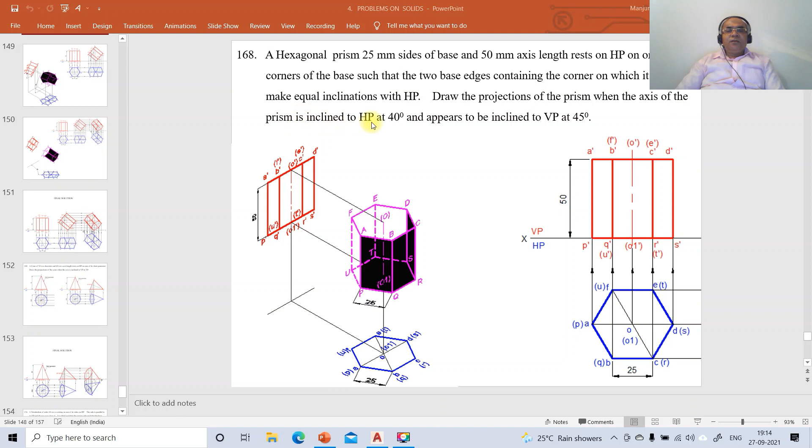Draw the projections of the prism when the axis of the prism is inclined to HP at 40 degrees and appears to be inclined to VP at 45 degrees. To do that, first we'll go to the AutoCAD screen, switch off the grid mode and switch on the ortho mode. The command is limits. So here 0,0, upper right corner is 297,210.

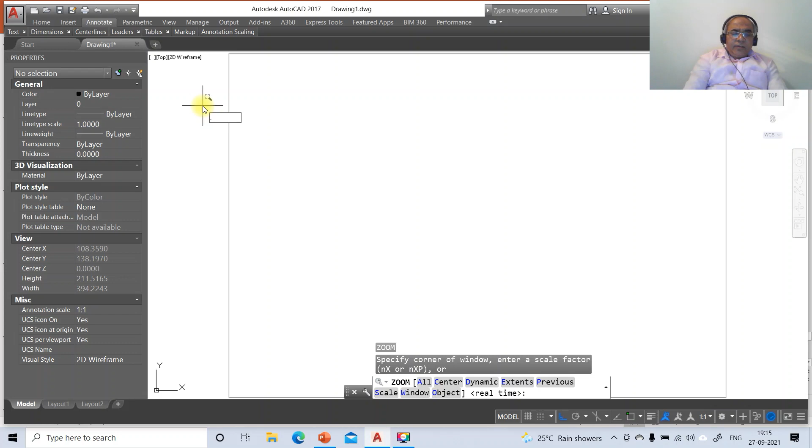Then go to line, select some arbitrary point, take the distance as 297. Then take the cursor to the top side, take the distance as 210. Then take the cursor to the left side and type the distance as 297 and say close, and then zoom extents and zoom 0.6x. Now we will go for the layer command.

Click on new layer, type the layer name XY. Click on new, type the layer name axis. Click on new, type the layer name front view. Click on new, type the layer name top view. Click on new, type the layer name front view hidden. Then click on new, type the layer name top view hidden.

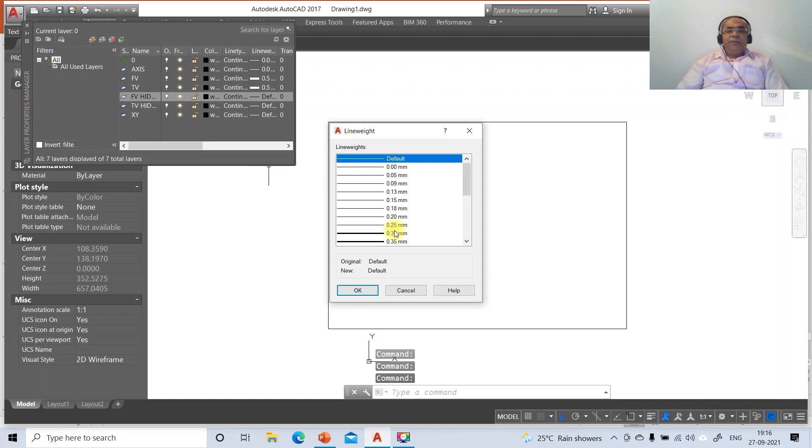Now once you do that, we are going to assign the line weights, make it 0.05. Then axis, again it will be 0.05. Then front view will be 0.5. And the top view, again it will be 0.5. And the front view hidden will be 0.3, and top view hidden will be 0.3. And the XY line will be 0.3.

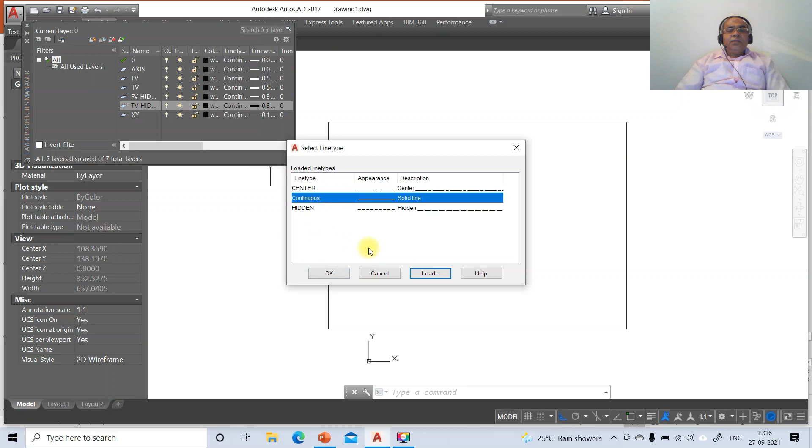Then you click on the continuous of top view hidden, click on load, type H. So you select this hidden, then go to load, to take center, type C and say OK. So you click on hidden line type and say OK. And click on front view hidden, you will click on hidden. Then for the axis line type continuous, you make that as center, then say OK.

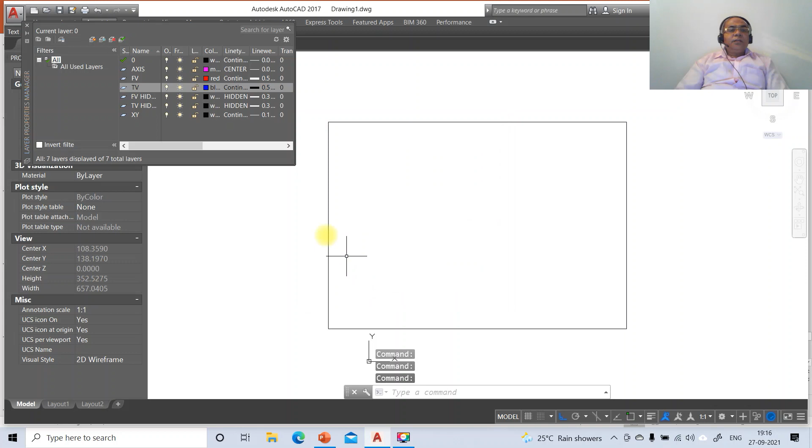And then the axis line, you make it magenta and say OK. Then front view, you take this as red. And top view, you take this as blue. Then front view hidden as red, then top view hidden as blue. And say OK, and then say close. Now we will go for the hexagon.

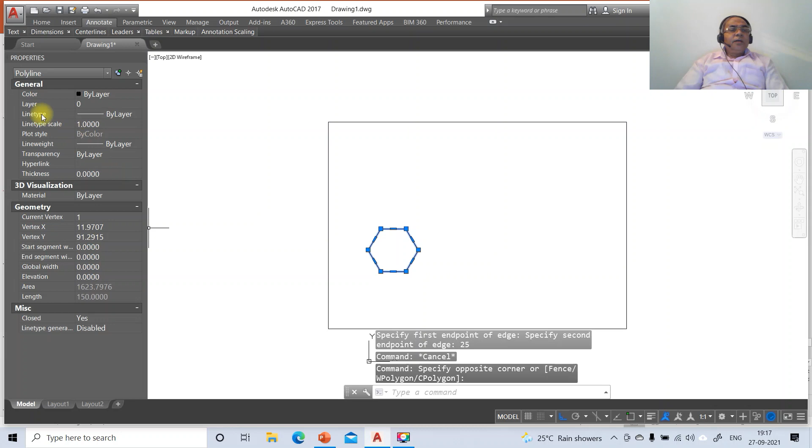So first we are going to take the polygon command, take the number of sides as 6, take the edge option and take the distance as 25. Then you just click on this and go to layer, make that layer top view and escape. Go to line, take INT of this and take intersection point of this. Then go to line, take INT of this and take intersection of this.

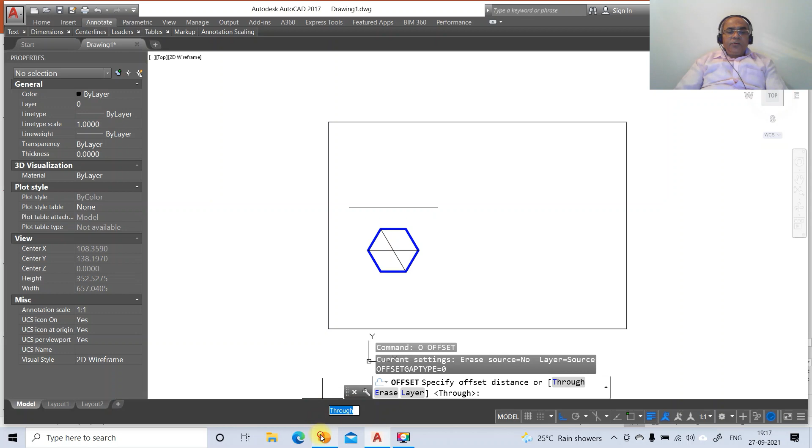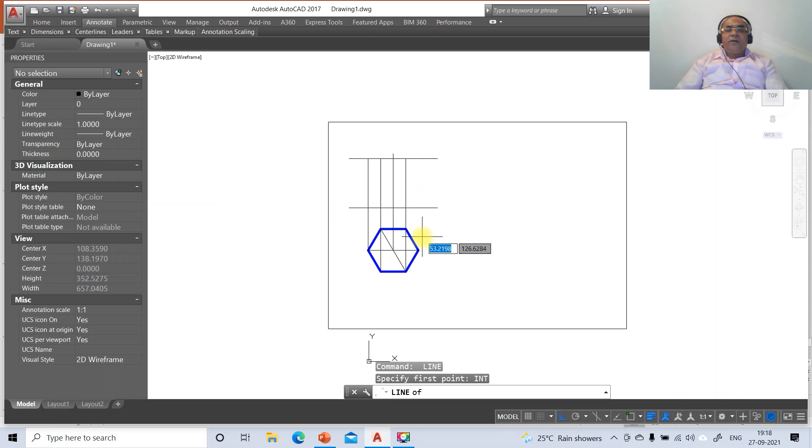Then go to offset. Now take the offset distance as 50. You select this and offset here. Then go to line, take INT of this and draw a vertical line. And go to line, take INT of this and draw perpendicular to this. Repeat: go to line, take INT of each point and draw perpendicular to this line.

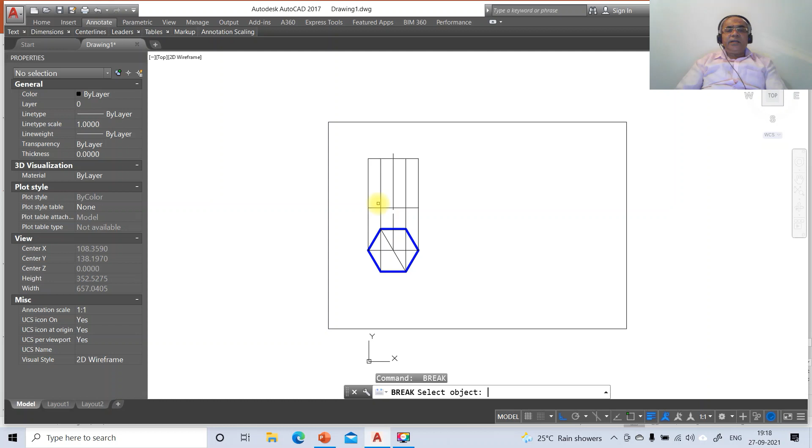Then go to trim, select these two as the cutting edges, then objects to trim as these two. Then go to break this line till here. Then go to break first point, take INT of this and say at the rate. Repeat break first point, take INT of this and say at the rate for the remaining lines.

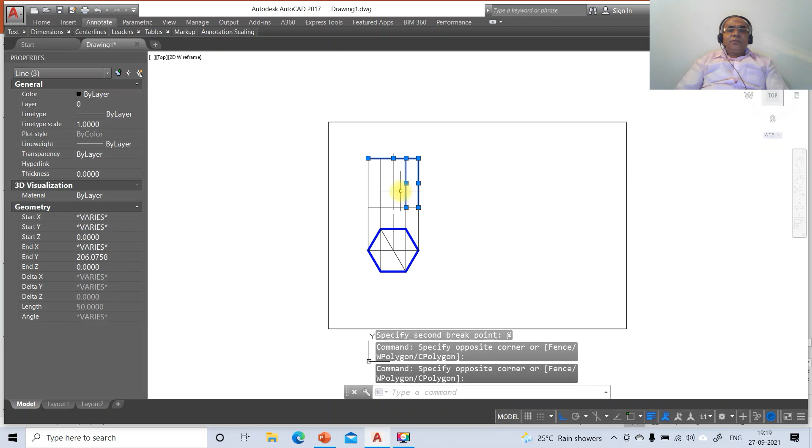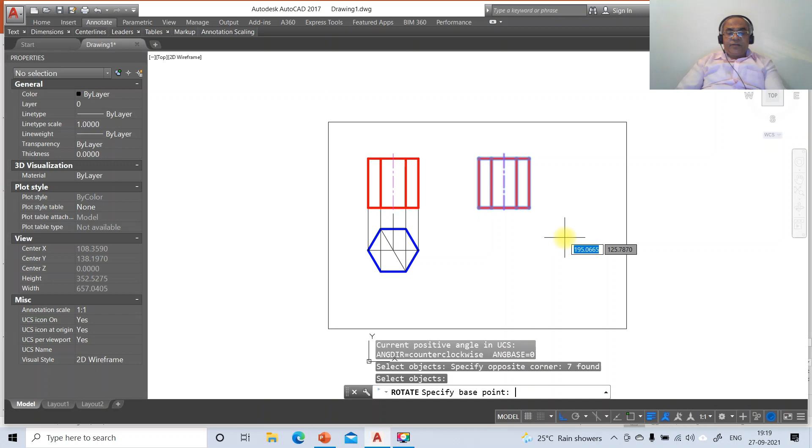Now you just click on these two lines, and go to layer, make this front view. Then again click on this and go to layer, make that layer axis and take the line type scale as 10. Then go to copy, select this entire drawing and copy to the next position. And now rotate by an angle of 40 degrees with respect to the XY line. So with respect to the vertical, it will be 50 degrees in counterclockwise direction, so obviously it will be positive.

Then go to move previous, you select this. Then go to line and draw a horizontal line. Go to line, take INT of this and draw perpendicular to this. Then go to line, take INT of this and draw perpendicular to this.

Similarly, go to line, go to the intersection of this and draw perpendicular to this. Then go to line, take INT of this and draw perpendicular to this. Then go to line, take INT of this and draw perpendicular to this.

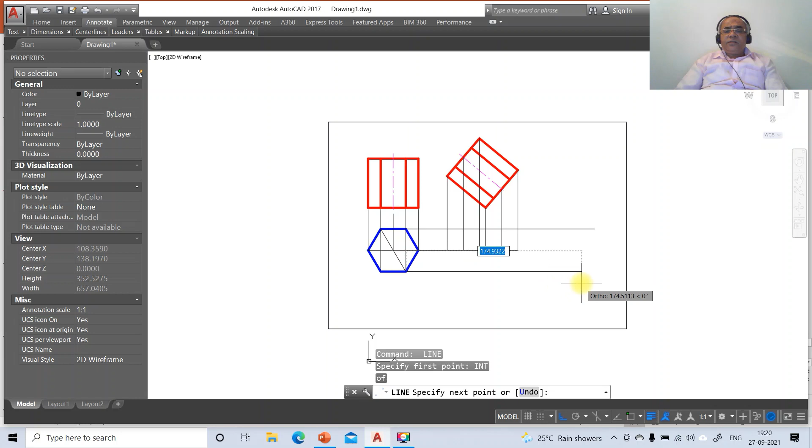Now once you do this, fillet between these two. Then go to line, take INT of this, then go to line, take INT of this, then go to line, take INT of this and draw perpendicular to this, then go to line, take INT of this and draw perpendicular to this. So the top surface is over.

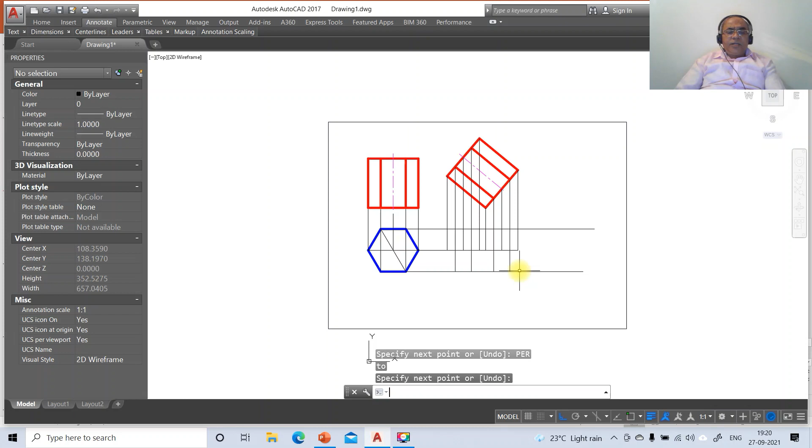Similarly, the bottom surface: draw perpendicular to this, then go to line, take INT of this and draw perpendicular to this. Now similarly, go to trim, select these two as the cutting edges and these two as the objects to trim. Now we will go for line. Take intersection of this, this, and this. So this is the top surface.

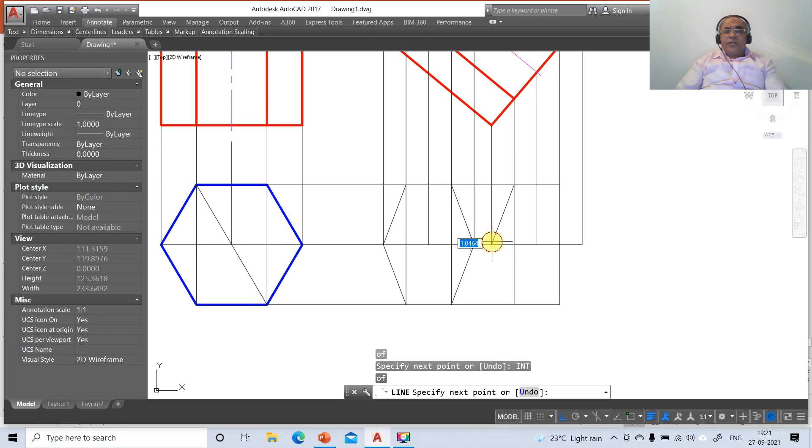So this hexagonal top surface I am joining now between these four. Then go to line, take INT of this and take intersection. Now I am going for the bottom surface hexagon. Take this intersection, this intersection and this intersection. Once you do that, go to break.

First point, take INT of this and say at the rate. Then break, first point, take intersection of this and say at the rate. Repeat the break at each intersection. Then it's already over.

Then go to break, first point, take INT of this and say at the rate, and repeat the break at each remaining intersection.

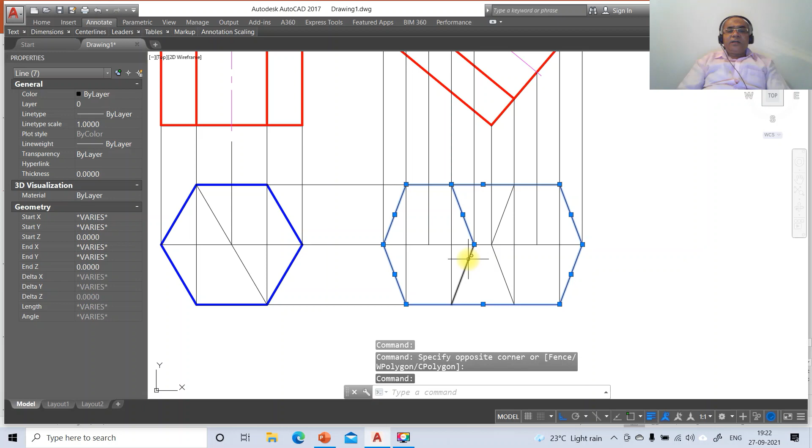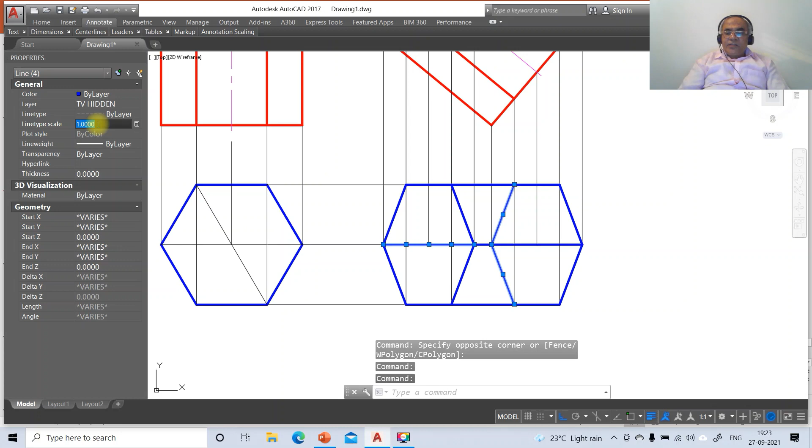Once you do that, zoom previous, then go to line, take the intersection of this and draw a horizontal line on this side and also from here on this side. Now we need to copy and rotate. Take the copy command, take the second position top view and copy it here.

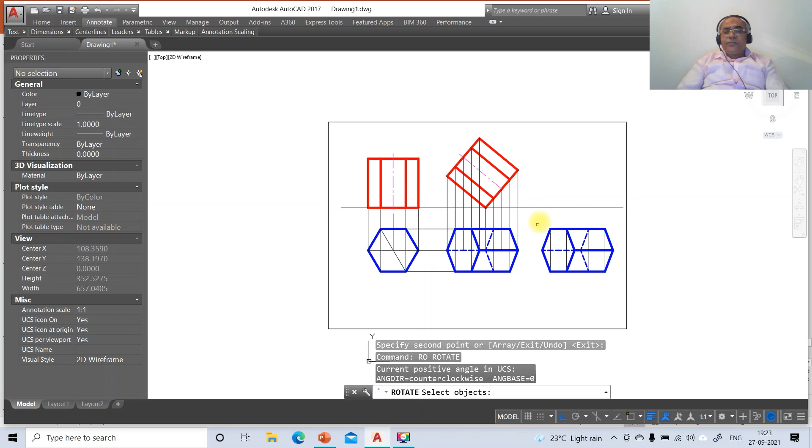Then go to rotate, rotate this about the intersection point, and the angle I want is 45 degrees clockwise, so I will say minus 45. Then go to move, switch off ortho mode, move this and place it wherever you want. Then zoom window; now I need to draw the third position front view.

To do that, click on ortho mode, then go to line, take INT of this and draw a horizontal line, take INT of this and draw perpendicular to this line. Then fillet between these two. Then come down to the next one, go to line, take INT of this and draw perpendicular to this, then line, take INT of this and draw perpendicular to this, then go to fillet.

Fillet between these two. Similarly, go to line, take the intersection point of this. Here you don't have an intersection but an endpoint, so take this endpoint, take perpendicular, then fillet between these two. Similarly, go to line, take INT of this and draw perpendicular to this, twice, then fillet between this line and this line.

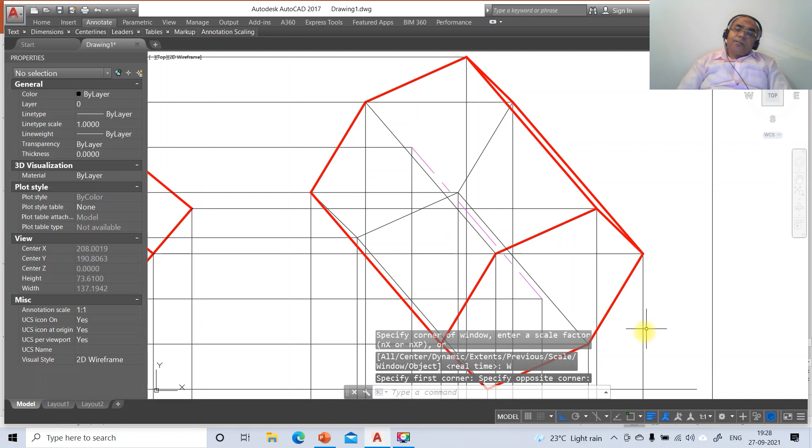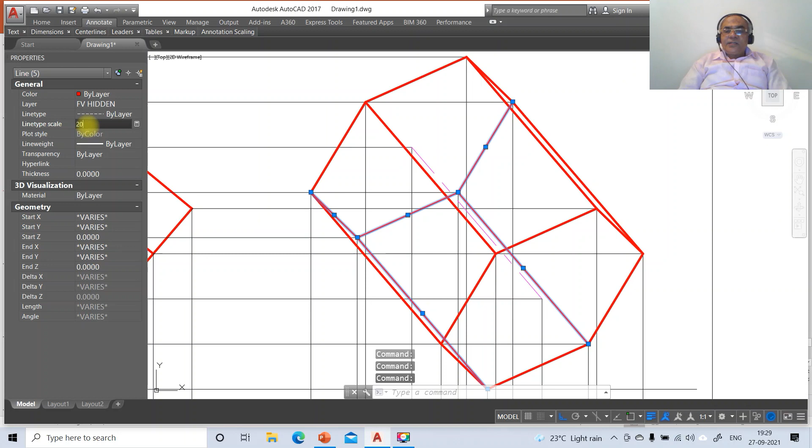Now you just come down to zoom window, as we know this line is visible, and here, okay, so this line is visible, so go to layer, you make that layer as front view. Now we have the left out portion is this one, so this line and this line and this line and this line all becomes invisible. Go to layer, make that as front view hidden, and take the distance as 20. So this drawing and this drawing is one and the same.

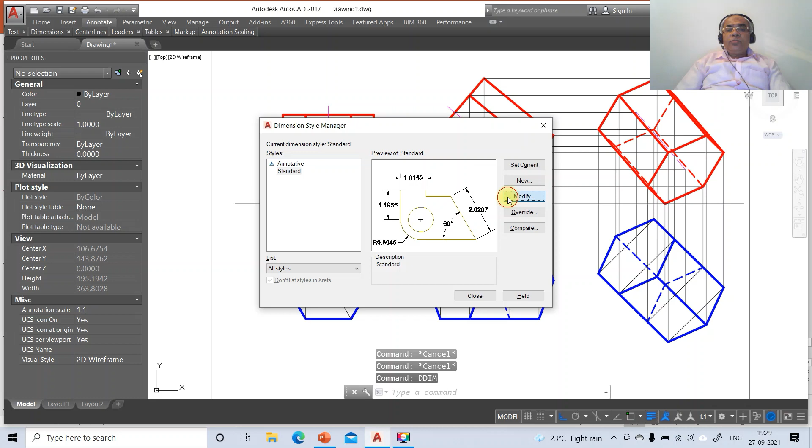So once you do that, then you just come down to this, then go to zoom previous. So you click on this and you click on this, go to layer, make that layer as XY. Then you just come down to zoom window. Now we need to go for DDIM, then go to modify, go to primary units, make it 0, go to text, take the text height as 3, align with the dimension line. Above, take the offset from the dimension line, go to arrow size as 3, go to lines, offset from the origin as 3, and say OK and say close.

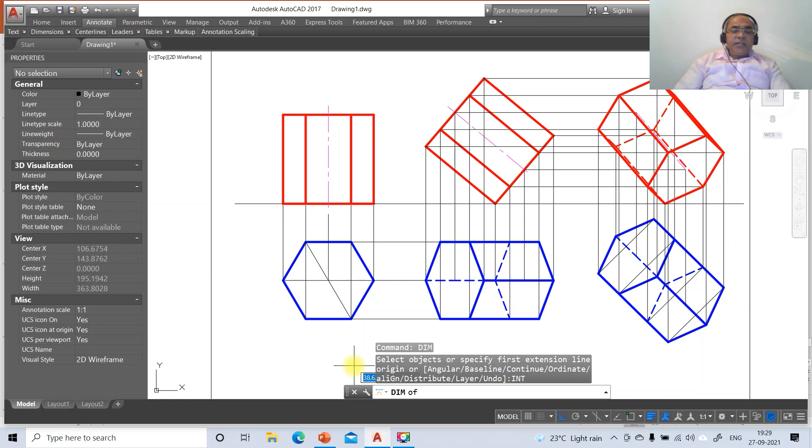Now we have dim, you take int of this and take intersection part of this. So you just go to 25, then go to intersection part of this and take int of this, and you're going to get 50. Then go to angular, select between this line and this line. So we got 40. Then angular between these two. So you're going to get 45.

So you just go to DIMTEDIT, text edit dimension. So you take this angle as 45. Then you take this as 40 degrees. Now we have break this line till here. So then we go to the text. So you mark this as 3, capital X, capital VP, and you have capital HP.

So you have capital Y. So here you mark this as small a, b, c, d, e, and f. Here it is O, and here it is O1 in bracket. Then you mark it as small p in bracket. All these are the bottom surfaces when you look from the top view, so they will become invisible. Obviously they will be shown in brackets, which is s, t and u.

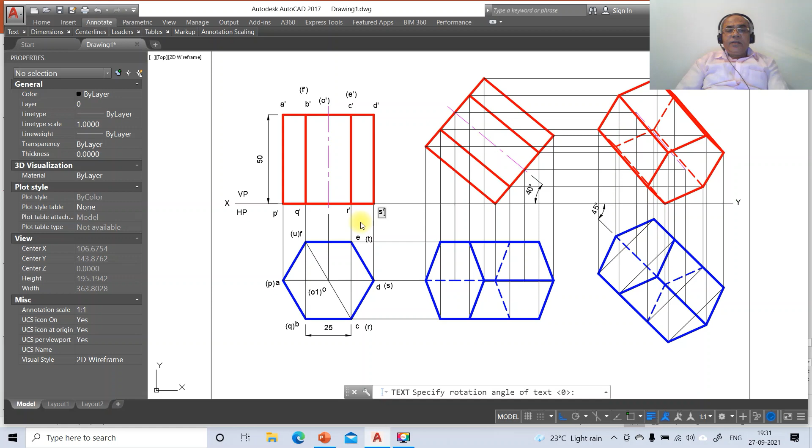Now we go to the front view. The edges which are near to the observer are visible. So A dash, B dash, C dash, and D dash become visible. Similarly you have E dash in bracket and F dash in bracket. Then O dash in bracket. Then P dash, Q dash, R dash, and S dash become visible. Then T dash in bracket, U dash in bracket, and O1 dash in bracket.

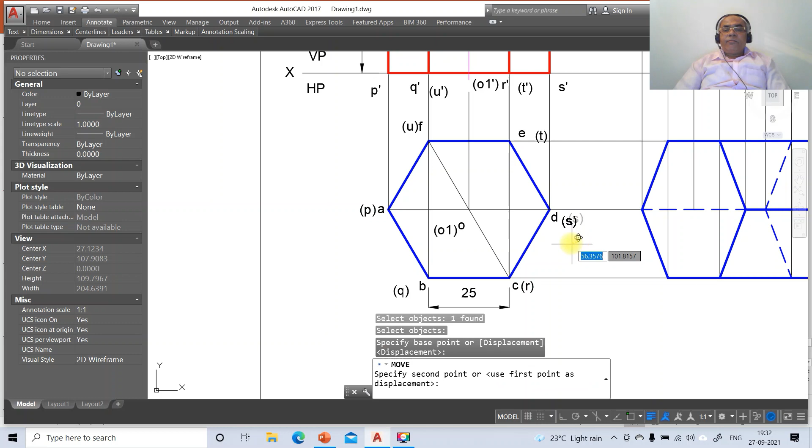Once you do that, go to zoom previous, then zoom window, take this, then go to move. So you take A, then P, then B, go to move this, you take C, R, D, S, O, O1, and Q.

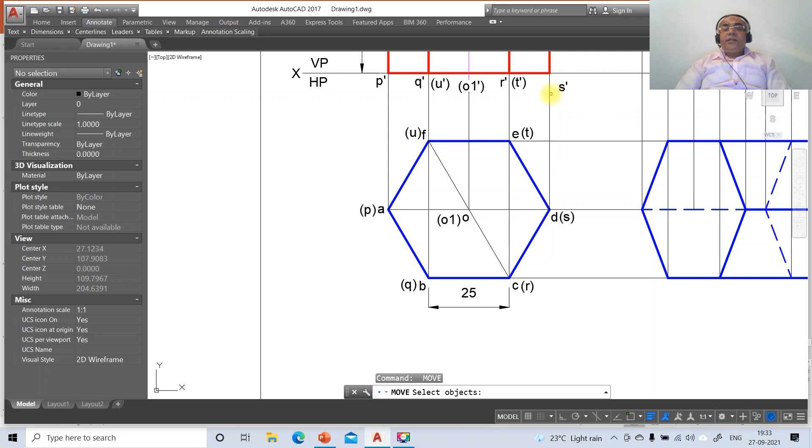Then you take E, T, F, U, then HP, then VP, then X, then P dash, Q dash, U dash, O1 dash, R dash, T dash, S dash. So here you take, here you take.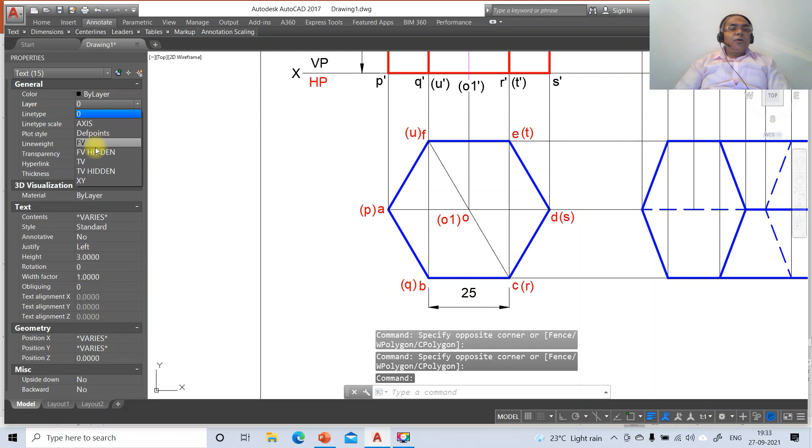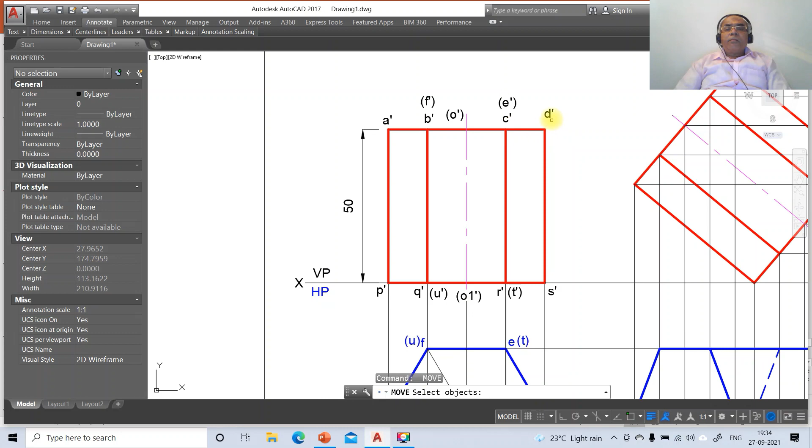Go to layer, make that layer as top view. Once you do that, go to zoom previous, then zoom window, then move. Then you select all these points, then VP. Layer, make that layer as front view. Now go to zoom previous, then zoom window, then go to copy.

So you take P dash, then Q dash, then U dash, then O1 dash, then R dash, then T dash, then S dash, then D dash, then C dash, then E dash, then O dash, then B dash, then F dash, then A dash.

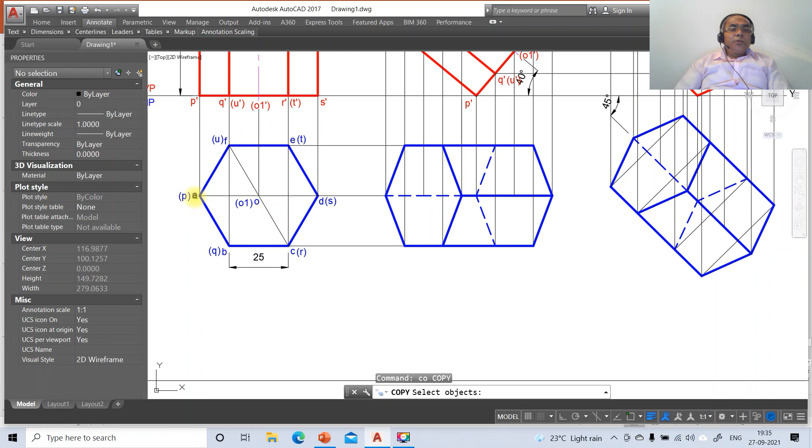Now you want to copy this down. You have copy, so you take A and that A will come here, you take B, that B will come here, you take C, that C will come here, you take D, that D will come here, you take E, that E will come here, you take F, that F will come here, you copy O, that O will come here, you copy O1, that O1 will come here.

Then you go to T, you take P, Q, R, S, T, U. Then, okay, go to move, take Q, R, S, T, U. So you keep P, U, Q, R, S and T, go to layer, make that layer as top view.

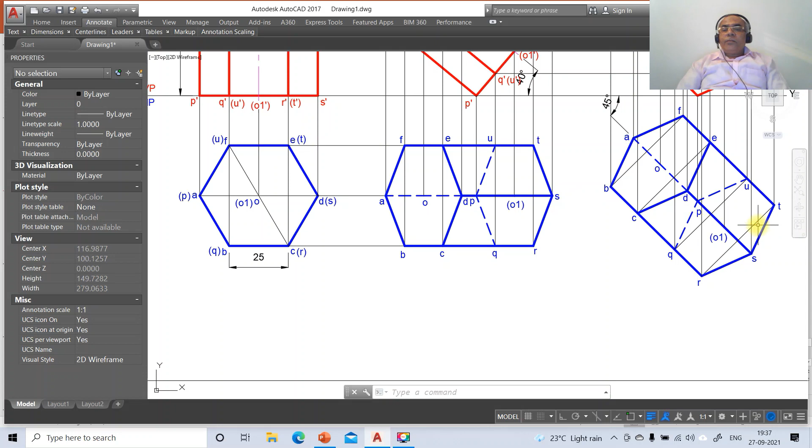Now you just copy P, you copy Q, you copy R, you copy S, you copy T, you copy U, then you come down to DTEXT, so you come down to this.

Then go to DTEXT. The A dash point is here, this is B dash, C dash, D dash, E dash, F dash, and this is O dash in bracket. Then here it is P dash, Q dash, R dash, S dash, T dash, U dash, and this is O1 dash. Then go to move, you take A dash.

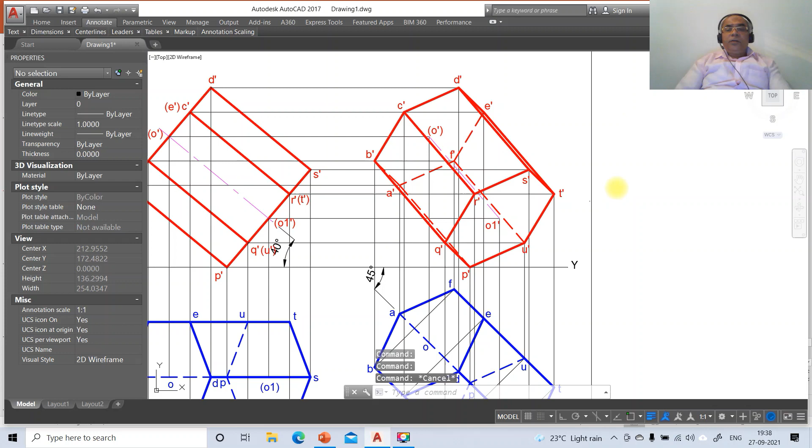You take B dash, C dash, D dash, E dash, F dash, O dash, R dash, S dash, T dash, O1 dash, U dash, P dash, then Q dash, and then you select all these points. Then go to layer, make that layer as front view, and then you just move one.

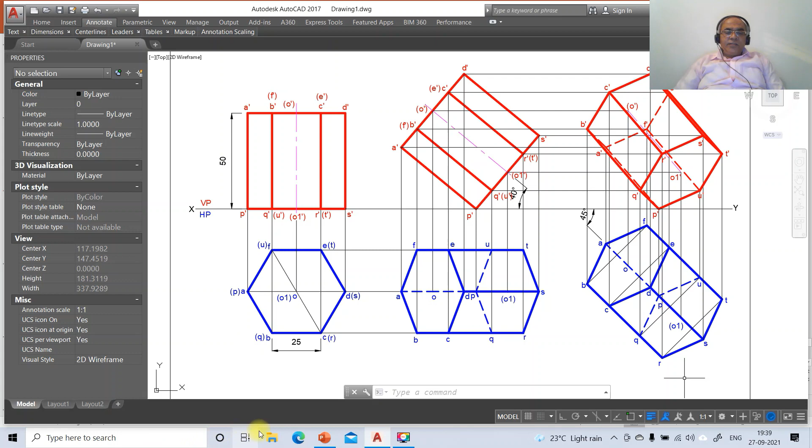So this is how you will be able to create this drawing using AutoCAD software of a hexagonal prism of 25 mm side resting on one of its corners, such that the axis makes an angle of 40 degrees with HP and appears to be inclined to VP at 45 degrees. So this drawing and this drawing are one and the same.